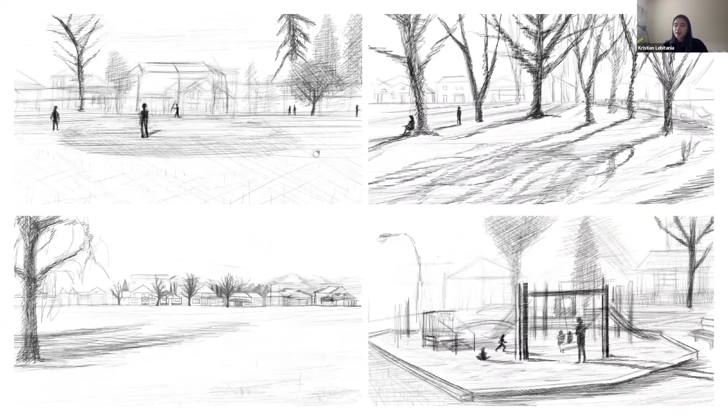And through sketching, we also observed the site's surroundings, nature, and the topography, which helped understand its water flow and drainage, and also the areas that were moisture retentive. We observed the squishy earth, seagulls and crows, smells of the exhaust, wind exposure, and light and shadow.

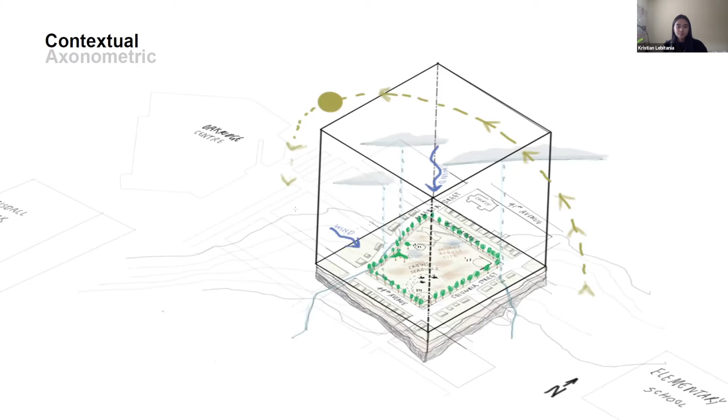So using these sun studies, we analyzed the sun at different times of year to understand opportunity for planting and constraints caused by the heavy shadows of the future buildings.

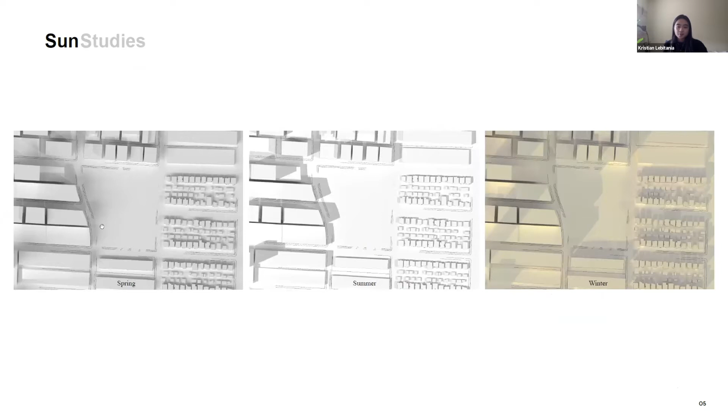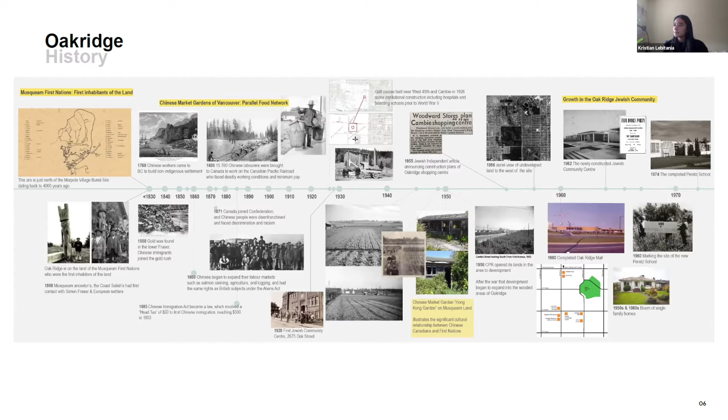Today, we find that Oakridge does not reflect or represent this history or the high demographic of its Asian population. We think these oppressed groups need to be recognized, which is especially important in these times of progressing anti-Asian violence. So with the Chinese market gardens in mind, our design statement is to design a commemorative and pedagogical space that serves as a stormwater garden and facilitates the interaction of people across ages, cultures, and abilities.

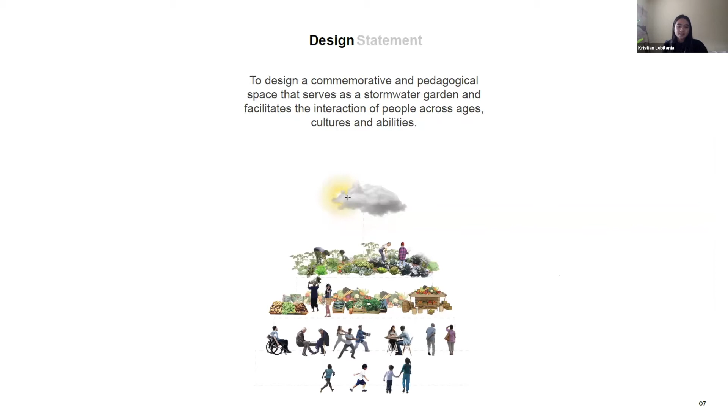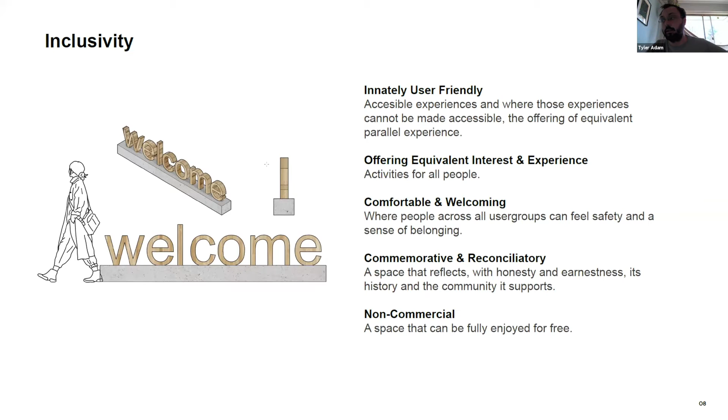To us, designing a public space meant creating an environment that was inherently democratic. A space that was innately user-friendly, offered equivalent interests and experiences, comfortable and welcoming, commemorative and reconciliatory, and non-commercial. Inspired by the land and the relationships it fostered, we thought what the space might look like if it functioned as it did. What if we drew inspiration from the Chinese market gardens of pre-war Vancouver?

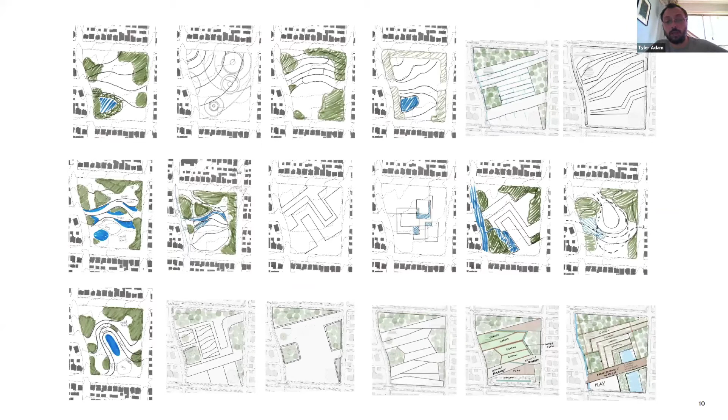Inspired by the idea of Chinese agriculture, we dug into motifs we were able to generate from rice paddy terracing. And as we iterated, ideas would begin swirling of experiences of what our site could offer. Seen here, a market for non-Western produce so as to differentiate from other nearby markets, terraced gardens, rainwater infrastructure, and activities for old and young.

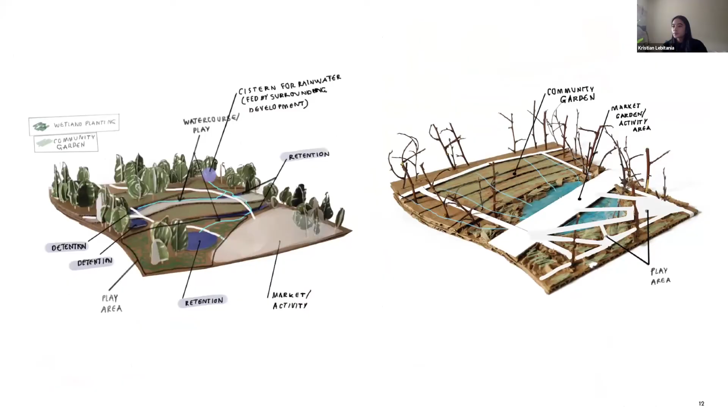Arranging our program through cardboard modeling, we developed our sloping terrace forms and also developed a raised promenade bridge that can optimize the wetland and drainage below. This is our plan of Columbia Market Gardens in context with future development and the Alberta Street green infrastructure.

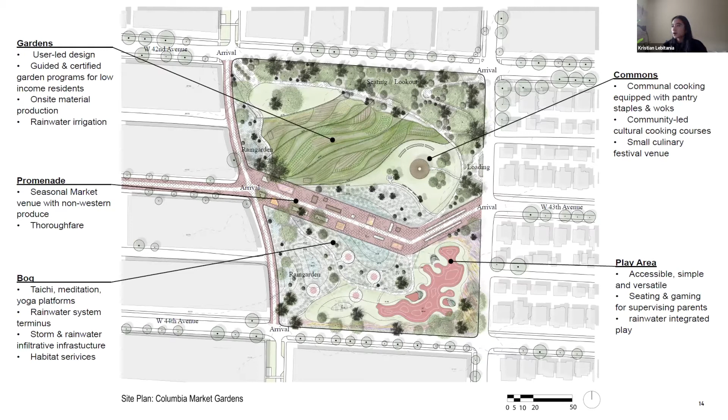The main areas include the gardens, the promenade, the wetland bog, the commons area, and the play area. So the garden would be seasonal and the promenade would serve as a market, and the bog would have areas for activity and also will include a play area. And overall, these spaces will be educational where people can have the opportunity to learn about gardening, green stormwater management systems, hydrodynamics, and native ecologies.

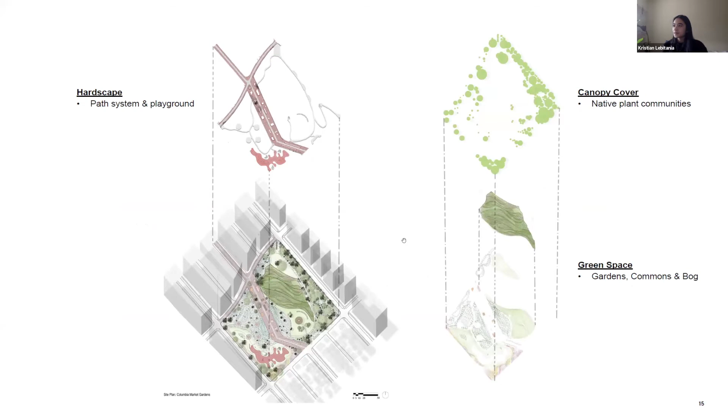In a deconstruction of our plan, we have the hardscape and path system and the softscape of meadow, lawn, wetland, gardens, and canopy cover. We also aim to improve the site's capacity as a pollinator habitat, its provision of food and materials, groundwater recharge and flood control, restoration, activity, carbon sequestration, and local climate regulation.

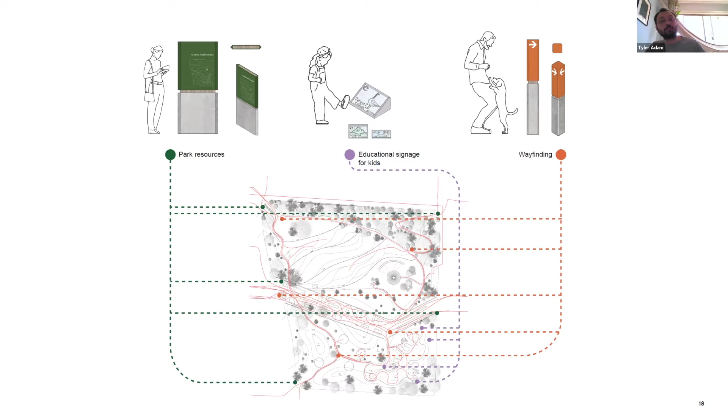To facilitate user-directed learning, an emphasis was placed on wayfinding. The green signs at the entrances for park directions and resources, the signposts for wayfinding, and the smaller signs for children, this example having the Musqueam alphabet. We also included signage that honors its history, the community, and the community the site supports, intended to foster feelings of safety and inclusion at each major entrance.

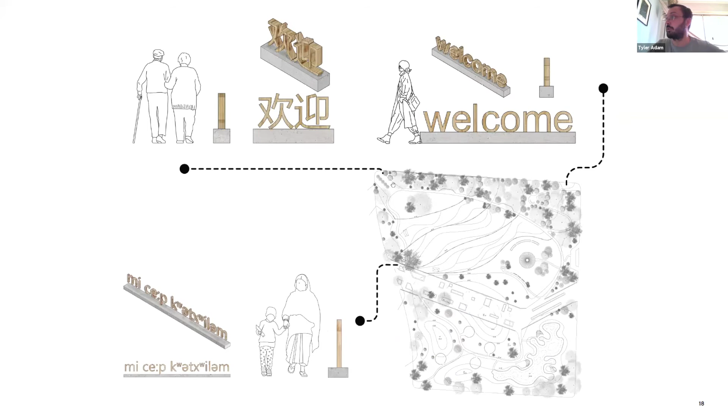Beyond form, other components of the site were inspired by various existing places as well, many of which were projects here in Vancouver. The gardening program inspired by Earth Hand Gleaner Society, and as you'll see, the planting itself is inspired by Pacific Spirit and Camosun Bog. The playground drawing inspiration from Buga 05 in Munich, and the promenade from various Turenscape projects, as well as the High Line in New York.

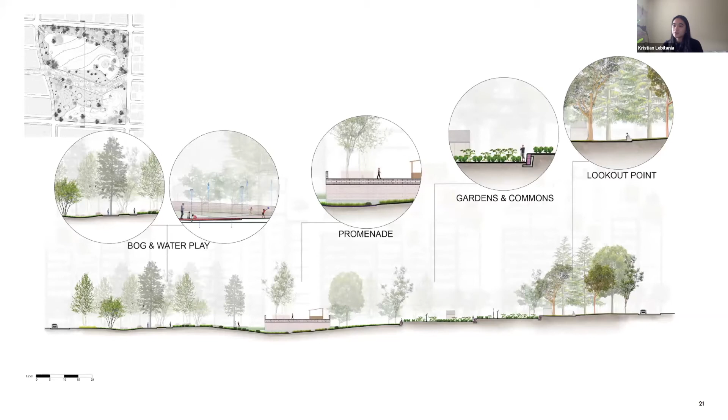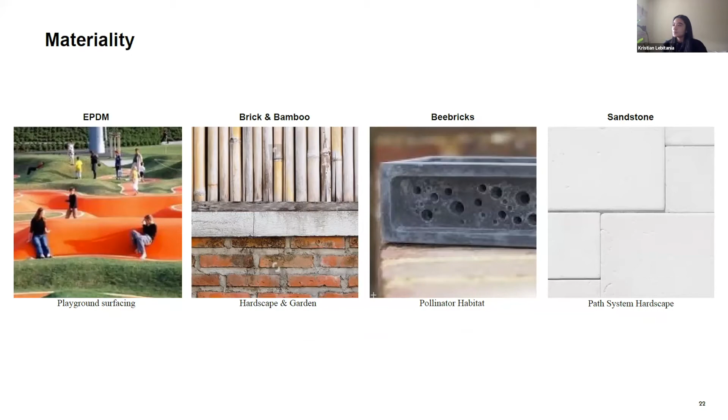The red brick is a symbol of joy and luck, and it's a means to unify with the plant palette and for its textural interplay with native foliage.

Up to this point, we were cognizant that our plans represented one side of the Musqueam-Chinese relationship. With our planting, our goal was to evoke the stories of the Musqueam people. We decided to do this by emulating natural plant associations.

It quickly became apparent this strategy had the potential for incorporation into our pedagogical framework. Descending the terraces, the microclimatic and soil conditions change as they do on the side of a mountain, facilitating the development of varying plant communities and associations.

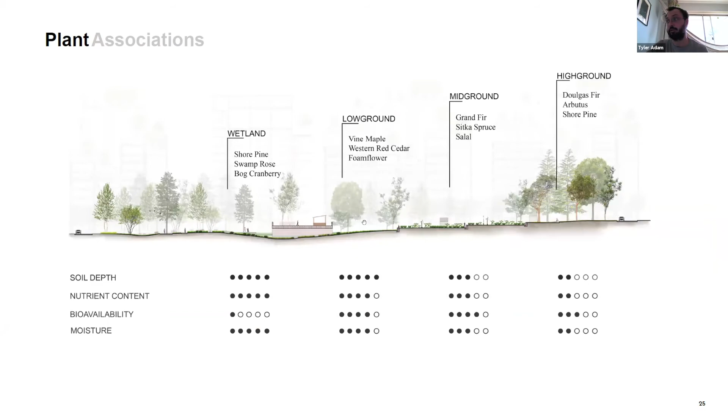This was achieved with a palette strongly geared towards plants you would find in the Lower Mainland, specifically Pacific Spirit Park and Camosun Bog, the land the Musqueam oral histories indicate as their origin.

Native planting was a means to achieve a sense of place. Columbia Market Gardens belongs and only belongs in the Lower Mainland.

To heighten the impact, we embellished with coloration, architecture, and seasonal displays with a select few non-natives. Red and its analogs dominate both the native plants and many of the embellishments, and along with their texture are intended to play with the site's materiality.

Culturally, bogs evoke a sense of mystery and a connotation of deep and eerie sensorial attributes.

We set out to represent Camosun Bog to a community that may not appreciate them in a way that, say, we might. We knew there would be attributes we may have to augment, but that we would have to do so sensitively and without sacrificing authenticity.

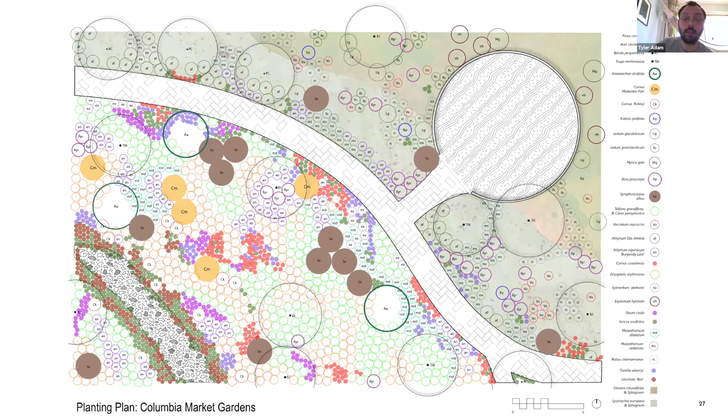For a user, walking through the bog is intended to evoke a sense of solemnity, a characteristic lending itself to the programming of introspective individual activities like meditation, tai chi, yoga, or sitting down to read, a quiet respite from the rest of the bustling park and urban center.

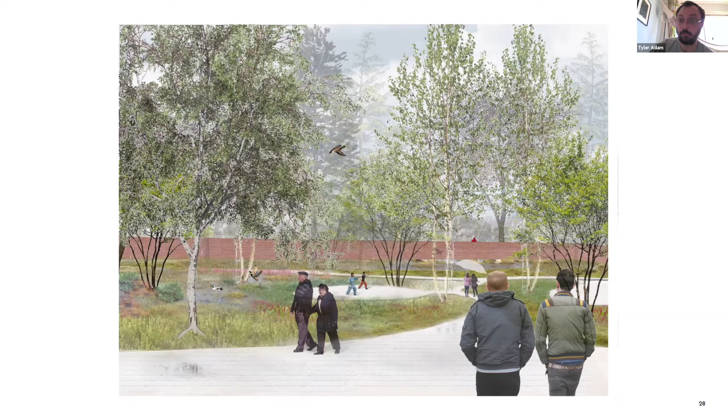Attention to the spatial arrangement of the planting also allowed us to frame some of the site's more precious views.

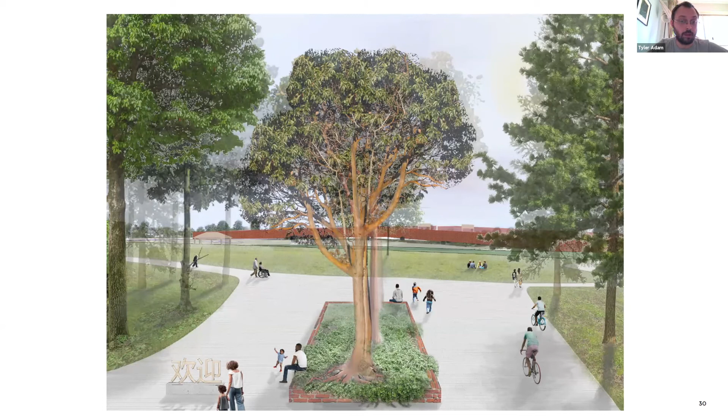From the top of the park, a row of arbutus and kinnikinnick guides the user into the space, from which the entire park enters view as the land drops away. A motif of paperbark trees like arbutus runs throughout the park.

The incorporation of rainwater was also central to the renewal project. Interfacing with Alberta Street's forthcoming stormwater plan was a mandate, but we wanted to go beyond. Stormwater, by definition, has come into contact with the ground or roadways and is unfit for human use without remediation.

But if you can intercept that rain and store it, it can be safely employed. In Columbia Market Gardens, we've used off-site rainwater infrastructure to stockpile and use throughout the drier months in the gardens, the play area, and ultimately to allow it to infiltrate back into the soil where it can recharge the Quadra Sands aquifer.

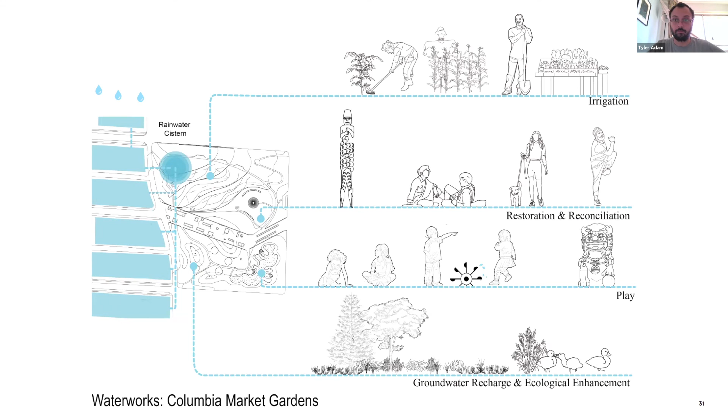The garden terraces are a place for instructing and learning, while captured rainwater from the cistern can be used to water the garden.

The commons area is not only a place for people gardening to rest, but also a space that offers an outdoor kitchen for communal cooking events hosted by organizations and local restaurant businesses. This is a place where people can come together to learn about culture and food.

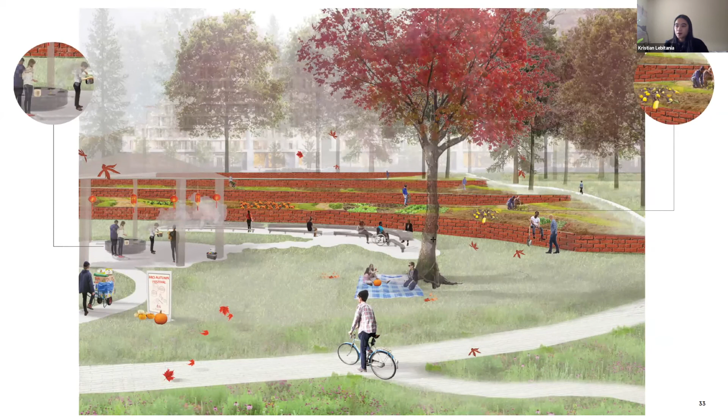During autumn, one can come across a moon festival event with smells of steamed taro and crab filling the air. While enjoying the food, one can admire the fall foliage and see vegetables like pumpkin and squash being harvested.

The wet playground is at a low point area surrounded by lawn and meadow for the sense of seclusion and safety. The red EPDM rubber is undulating and drainable.

Being at the end of the rainwater system, play elements use the cistern rainwater for fountains, a bamboo water spout, and a water wheel.

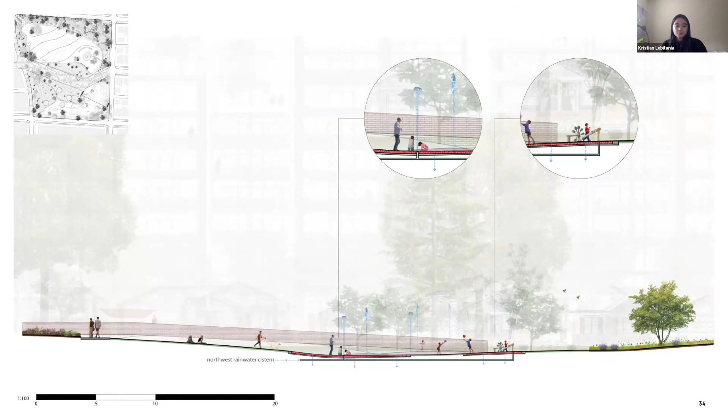And at a glance, this is how we change the moisture profile.

So from this project, we learned that landscapes in Vancouver are too regularly reflective of its white majority, and this often results in lackluster design like what Columbia Park at present exemplifies. But Vancouver isn't as homogeneous as its park system would have you believe.

We grew to feel like designing with the intention of inclusivity not only presents an avenue for compelling, inspired, and engaging spaces, but an opportunity to reflect on local and global histories with honest and earnest consideration, and to develop common environments that could serve and excite everyone.

And with the ever-present threat of the depreciating quantity of urban public space, it becomes increasingly important for policy decisions to emphasize the quality of the spaces we create.